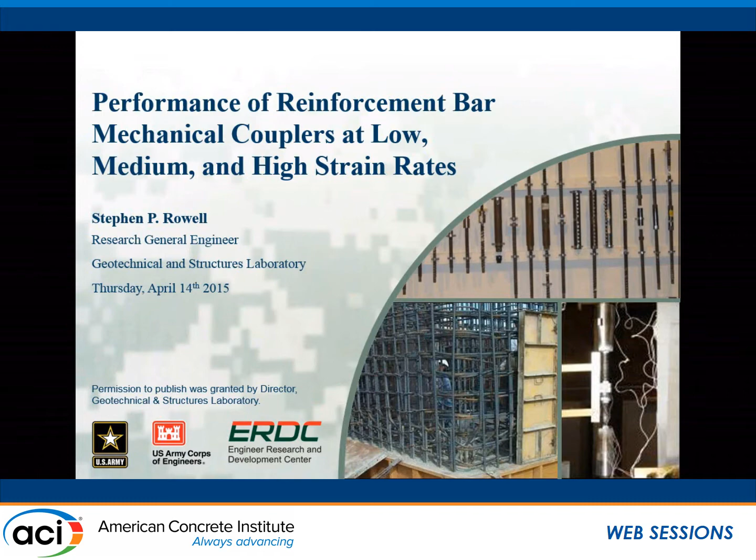So a little bit about what we're going to discuss. Some background of some previous work. There was some work done back at ERDC, or at Waterways Experiment Station, back in the 70s that was incorporated in our existing guidance at that time. But many of those splice systems were based on welds and different types of splices that are kind of irrelevant based on current practice. And so Steve expanded on that with some additional testing that we'll talk about.

We'll talk about what the guidance was in the UFC prior to Change 1 that Bill talked about a little bit, and then what that guidance looks like now. And then we'll go through some examples of different mechanical couplers that are out there. They sort of cover the main families of mechanical couplers that are available today, and we'll just go through their performance.

So just a quick background, and Bill did a good job covering this. But in Change 1 in our UFC 3-340-02, that incorporated for the first time the implementation or potential use of mechanical couplers for reinforcement. And so it provided a testing protocol and guidance on acceptance limit states for actually using this in practice. So this was implemented in the UFC primarily to replace lap splice connections, especially in areas where we have heavy reinforcement or larger bars where we have to use mechanical couplers oftentimes to prevent congestion as well as improve economy, in some cases for very large bars.

And so this built upon the previous research that was conducted by Flathau. We'll go over that a little bit, back in the 70s, with new work conducted in the late 2000s that's been published and since incorporated into guidance. And so this expands upon a lot of data that's out there on these mechanical couplers for more normal loading conditions. So there is data out there for using mechanical couplers in quasi-static loading strain rates, up to somewhat intermediate strain rates that might be relevant for seismic type loading conditions or cyclic loads, but there hasn't been any studies until some of the work done here to look at dynamic loading conditions and the behavior of many different types of mechanical couplers. And so that's where this work came in.

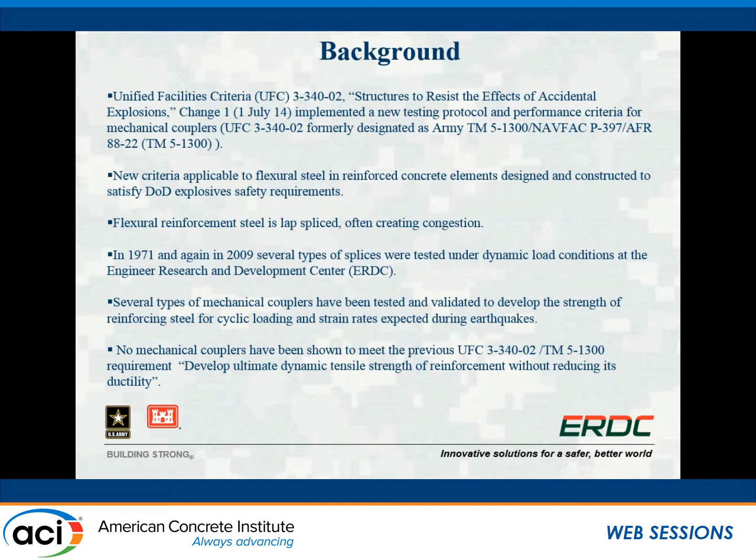And as Bill mentioned, it was really to build upon or to allow the applicability of using some of these mechanical couplers to expand upon the original guidance provided in the UFC. And you can see that quoted at the bottom, which states, if you're using a mechanical coupler, it has to develop the same ultimate tensile strength and same ductility as the bar itself. So, if you read that very literally like a lawyer, basically no mechanical coupler that's out there today meets that requirement. So we're going to go through what the actual behavior is and some acceptance limits.

So the original research done by Flathau was published in 1971. This was done back at the then Waterways Experiment Station. You can see the title of this report, Dynamic Tests of Large Reinforcing Bar Splices. And I believe this has been made electronic, and you can probably Google it and download it. And so they looked at various splices that were available at that time, focusing on number 11 bars at quasi-static, intermediate, and high rates, just given the limitations of equipment. Looking at grade 60 and grade 75 bars with splices at that time that were primarily based on welded connections.

This is the setup. This looks very similar to what we use today. Over in Steve's building, I think it's a 200 kip high rate loader, which is gas driven, and they have high speed cameras and things. This is from the original report, so everything's been updated with new instrumentation and things, but it looks basically the same today, other than it being color. And so here on the right, you can see a little review of some of the research that was executed by Steve and his group in 2009.

That was published in an ERDC report, I believe TR-09-8 is the document number, and it's titled High Strain Rate Testing of Mechanical Couplers. This replicated the work that was done by Flathau, but looked at a variety of new types of mechanical couplers that are on the market today.

They focused on number 10 bars, replicated the strain rates that were done in Flathau's study, and then did tests on as-rolled and machined bars, so we have some control baseline results to compare against. Then they looked at a variety of these different coupler systems: upset couplers, grouted sleeves, shear screws, threaded systems, and threaded bar couplers.

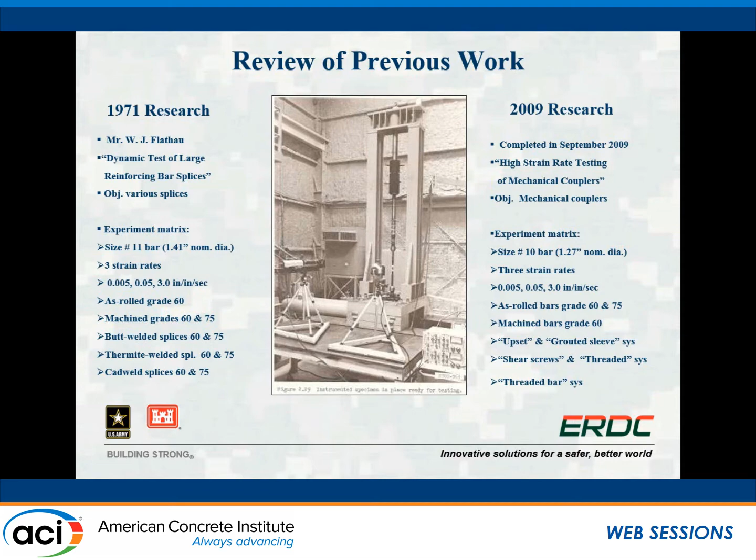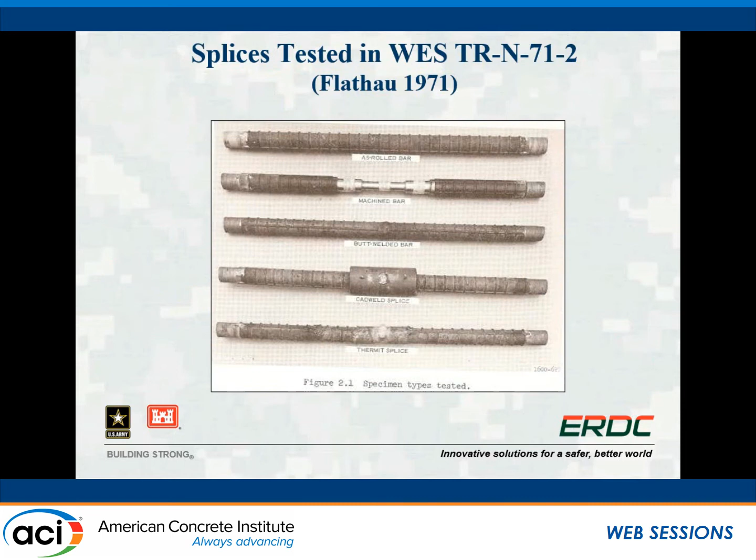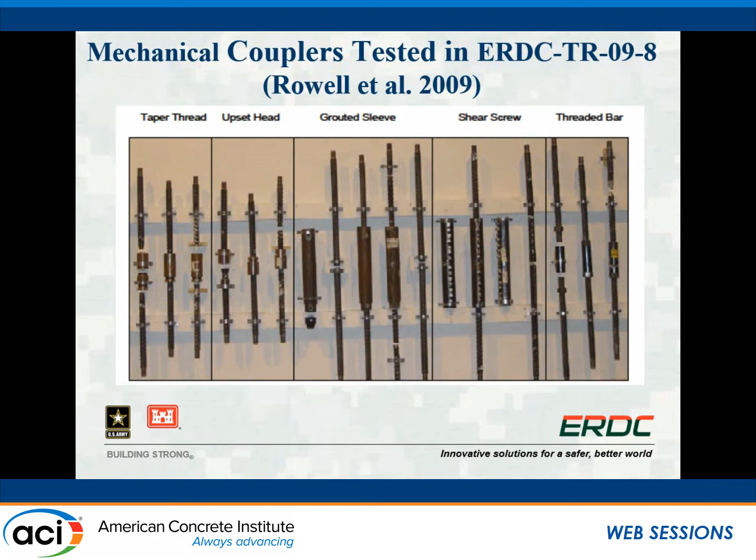Here's a photo of some of the couplers and the control baseline samples from Flathau's original study. This is just cut out of the original technical report. Here you can see a photo of some of the different systems that Steve and their team examined. The study is a lot more broad than this, but as far as applicability to UFC, this is the data it's based on. So a variety of different coupler systems: the tapered thread, upset head, grouted sleeve, shear screw, and then threaded bar coupler.

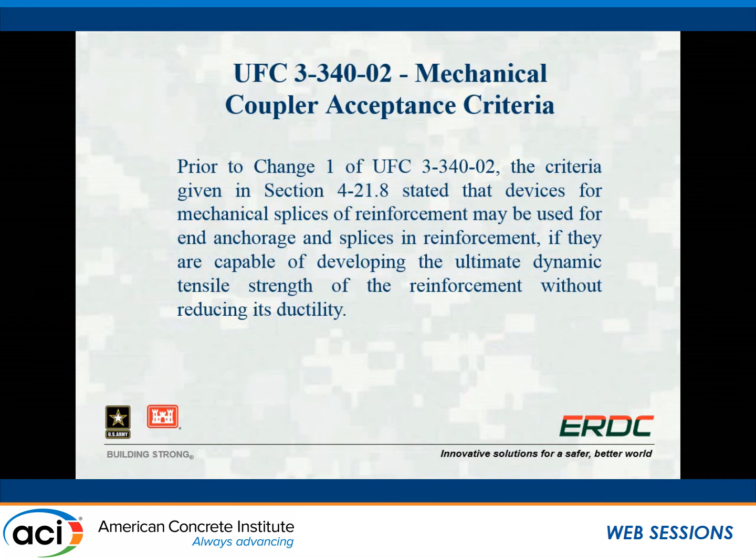If we look at that guidance prior to Change 1 in UFC, again, it requires that if we're going to use mechanical splices of reinforcement, they have to develop basically the same dynamic tensile strength and the same ductility. We're going to step through a lot of data and look at how that is very difficult, basically impossible, to achieve with most of these. Even in a perfect system, they still introduce a defect or discontinuity that makes these systems prone to reducing mechanical properties somewhat.

I'm just going to show a few different stress strain curves for some of these different systems. These are all obtained in these dynamic tests, so it's a strain rate of 3 per second. You can see these black curves are for the baseline material, the as-received, as-rolled reinforcing bars. For these particular grade 75 bars, the yield strength is about 80-85 KSI, and you get about 12 to 14% ductility.

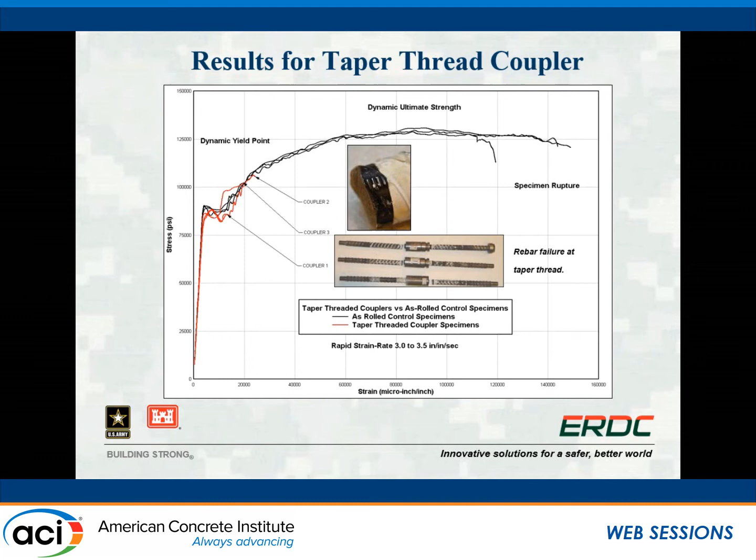It's pretty typical. But in the case of this tapered thread coupler, we can see pretty significant reductions in ultimate strength. The ultimate strength in these bars is around 130 KSI, and it reduces in this case to around 105 KSI. You also get some pretty significant reductions in ductility, from 12-14% down to less than 3%. I also wanted to note that most of these failures are associated with the coupler, with threads in the coupler initiating fracture.

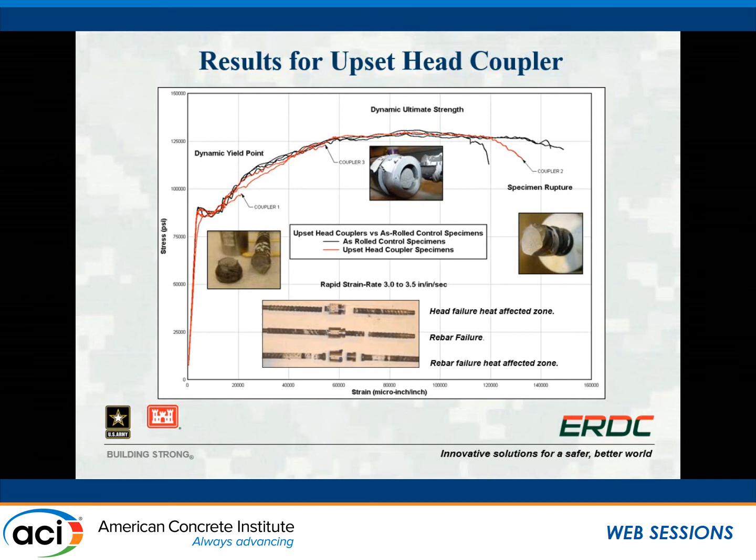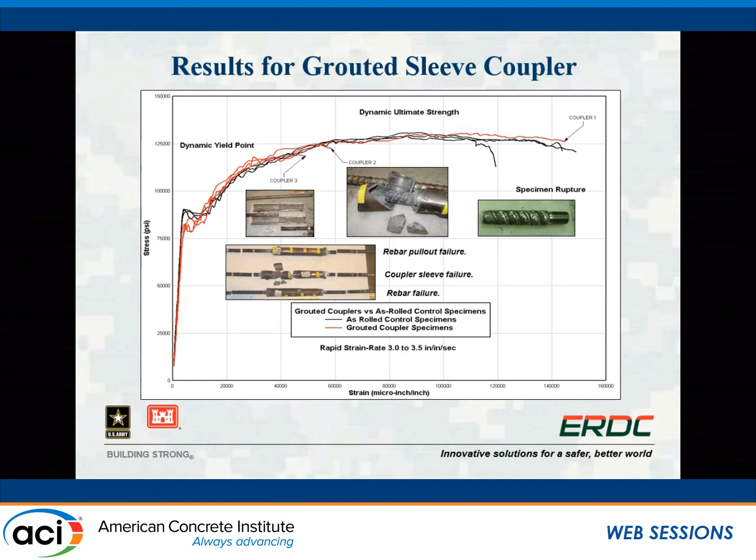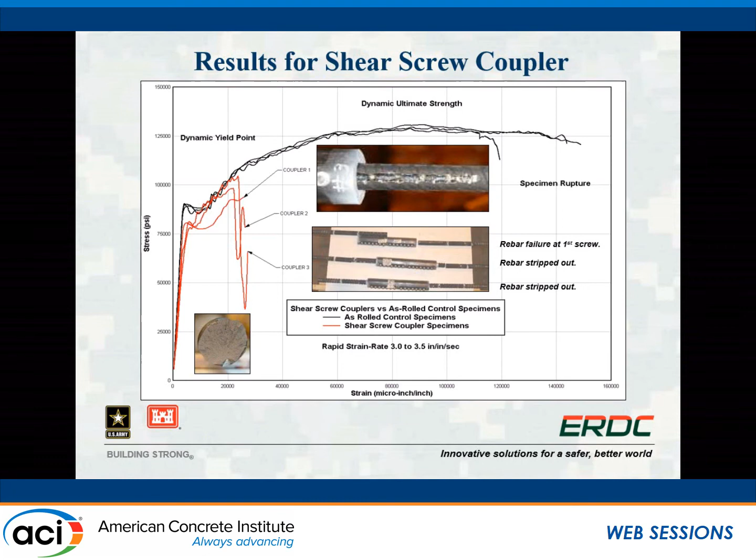The shear screw couplers all behaved in a similar fashion, especially at dynamic strain rates. We'll see some actual quantitative results from these. But for all of these tests, we saw significant reductions in tensile strength and ductility, and they were very consistent between each sample, where in general the rebar just pulled out of the coupler at lower strength levels and lower percent elongations.

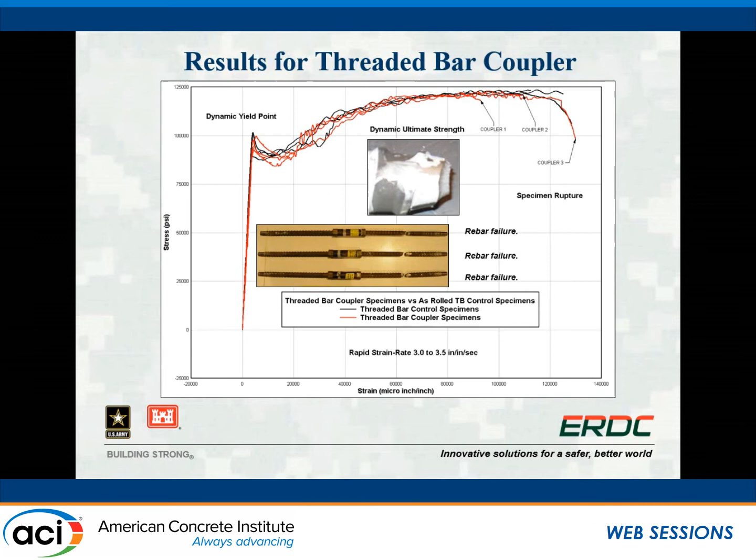Okay. So some of the data from that, as well as a lot of other testing, was used to be implemented in this Change 1 guidance to allow for, or try to allow for more use of mechanical couplers when needed. And so this is the language of how that was incorporated. So now we have some guidance on how these tests can actually be conducted, which will replicate the work that was done by Steve and his group.

So it defines the way the test is conducted, the strain rates that have to be considered, and those are referenced back to that ERDC TR09-8 with a minimum of 9 tests, so you do triplicate tests at your 3 different strain rates. And so the acceptance limits for this, now we have an actual quantitative ductility limit rather than just saying it has to match the properties of the bar itself. We can reduce that and allow for some reductions in ductility based on the coupler.

And so if out of those triplicate tests, all of them have similar tensile strengths and they exceed 3% elongation, you can accept those couplers for use. Now, if 1 out of the 3 actually doesn't meet that 3% strain, we can test 2 additional samples. Those 2 additional samples have to meet the 3% elongation requirement, so a total of 4 out of 5 have to meet the elongation requirement. Otherwise, that coupler is rejected.

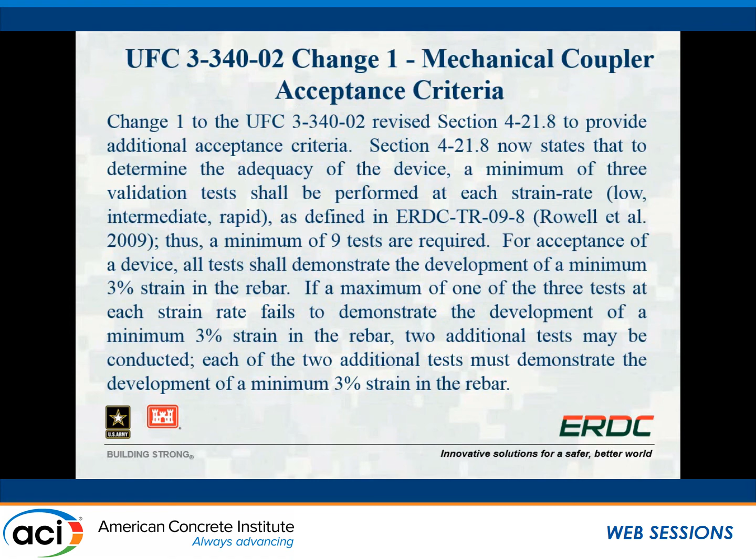Okay, so just to show you a few examples of these different systems, and again, these requirements apply at all strain rates. So if it doesn't meet at quasi-static, it's probably not going to meet at dynamic either, but in some cases that doesn't happen. So I just wanted to step through a few examples. We can actually look at some numbers rather than stress strain curves to compare for these.

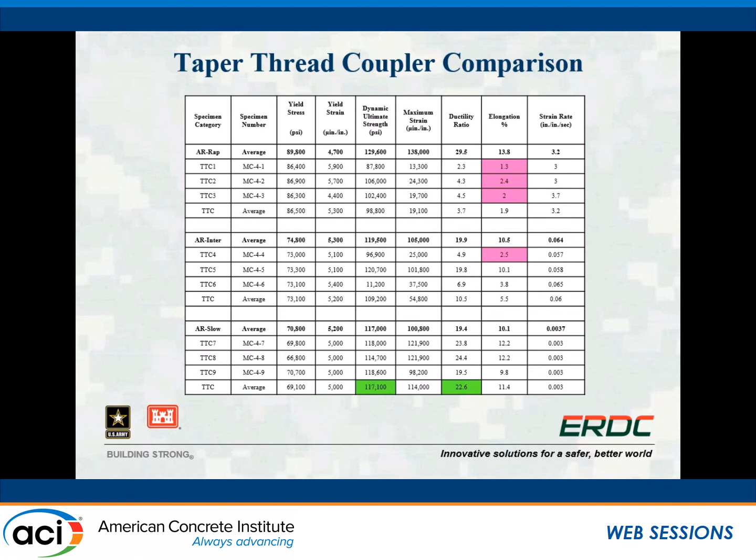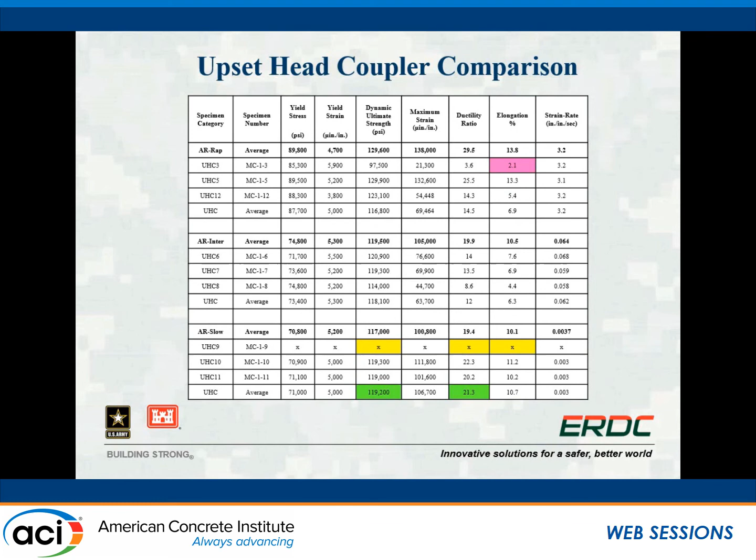Similar for this upset head coupler that we talked a little bit about, we get fairly good performance if we're looking at quasi-static strain rates, but as we step up to dynamic strain rates, those properties are reduced, both the strength and percent elongation. For the grouted sleeve, even though the failures were probably not ideal, did have acceptable properties at all strain rates. We saw tensile strengths and elongations that were acceptable based on the UFC Change 1.

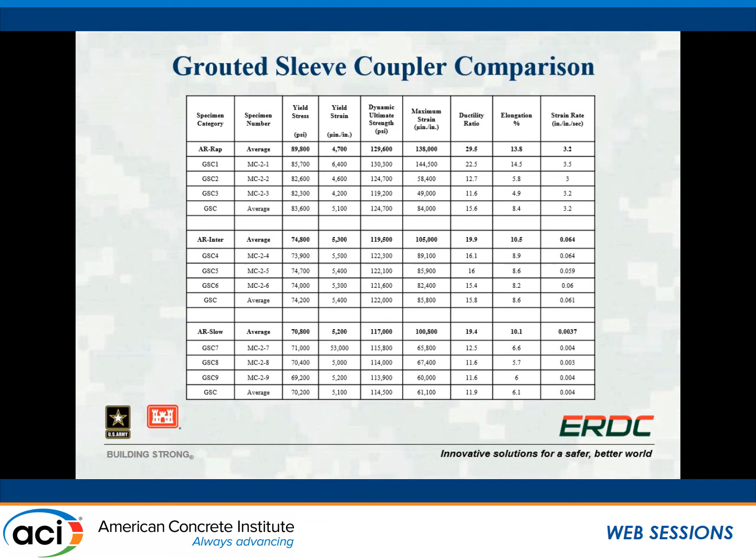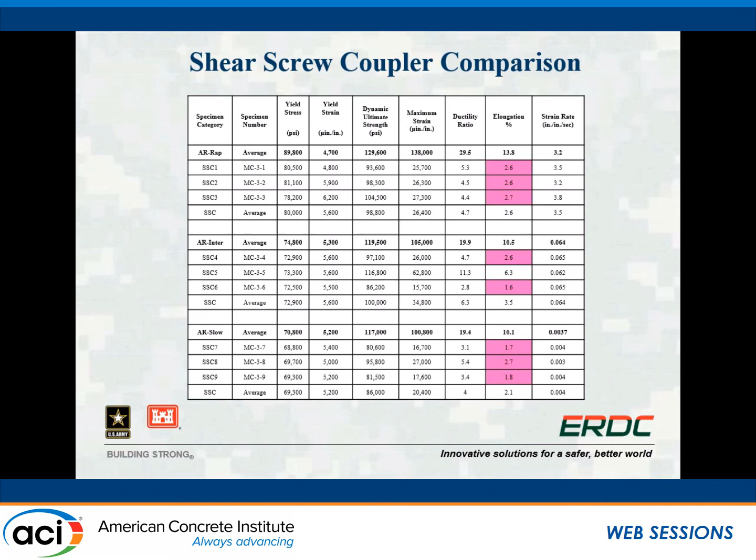And then the shear screw coupler, this didn't actually perform well even in quasi-static conditions. So you can see the results where we've got reductions in tensile strength of the bar and also reductions in ductility, and those extrapolate through all the strain rates that were investigated where we just had pull out of the bar from the coupler. And then finally for this threaded bar coupler, which performed the best out of everything that was investigated. And so you can see in quasi-static, intermediate, and high strain rates, we saw acceptable levels of ultimate strength and percent elongation for all the samples tested.

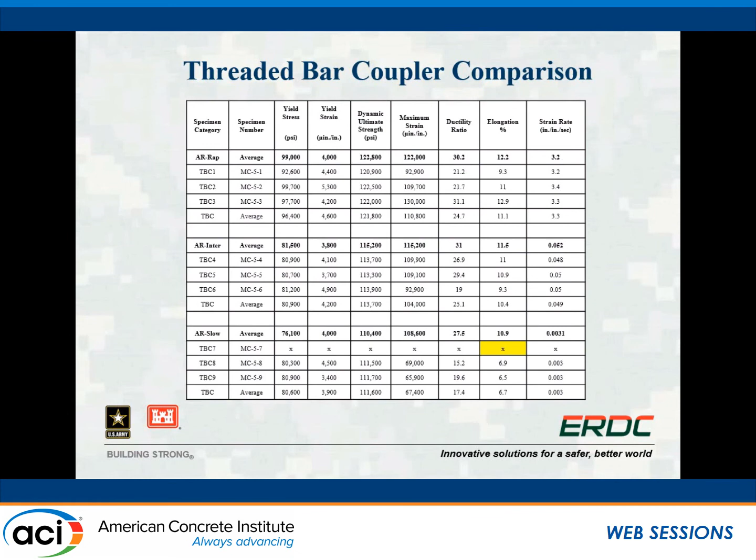So just some conclusions from that testing that was done. Again, in UFC Change 1, we've incorporated guidance to actually do this testing. Under the previous testing, if we use the previous criteria, only 2 out of all the modern coupler systems that were investigated would meet those requirements in quasi-static conditions. None of them would meet the requirements in dynamic conditions.

So if we look at this Change 1 incorporation in UFC, 1 of the 5 coupler systems that was investigated, that threaded bar system, actually meets those requirements easily. 2 of them had at least 1 test out of the 3 tests that required additional testing, and those were deemed to be adequate. And then 2 out of the 5 systems were deemed to be inadequate and were rejected. No additional testing was required.

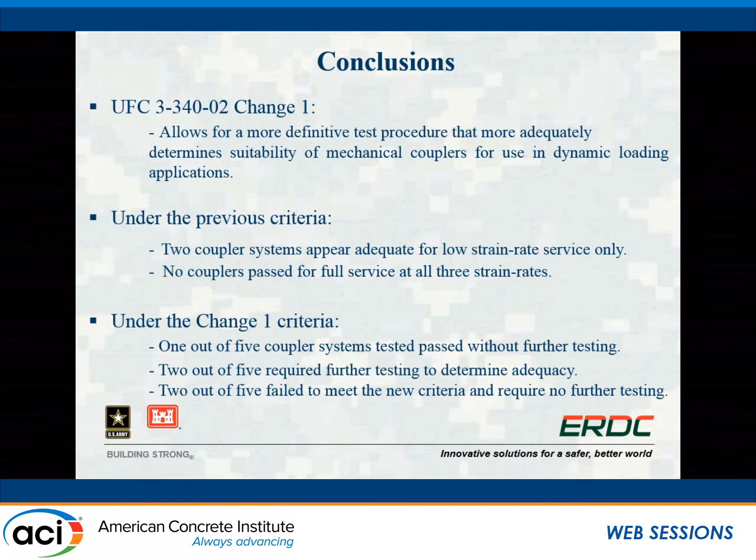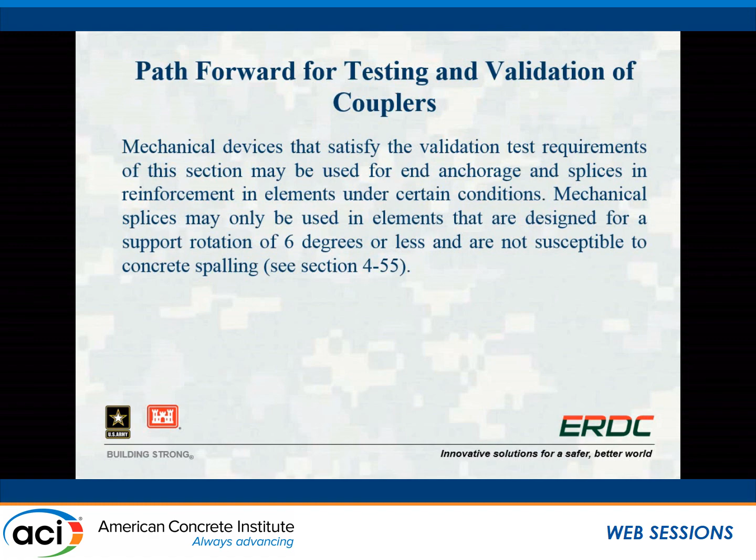So how we're going to incorporate this into UFC is, so now we can use mechanical devices, mechanical couplers for connections to replace lap splices in congested zones in reinforced concrete systems, with some provisions based on confinement that needs to be provided by the concrete, especially in areas that are prone to spalling and things of that nature. And so the guidance for actually doing this testing has to be done in our laboratory according to the guidance provided in this TR09-8.

And based on some additional testing that Steve and his group actually executed, they've divided that into 2 different size ranges where tests have to be performed depending on when and where the couplers are actually going to be used. Most oftentimes that's going to be on larger bars, but in some cases, may also be applied for smaller bars, especially for retrofit applications and things like that. And so those bars can be tested to determine whether they're applicable, and then the results for that coupler can be basically extrapolated over the other bar sizes in those groups.

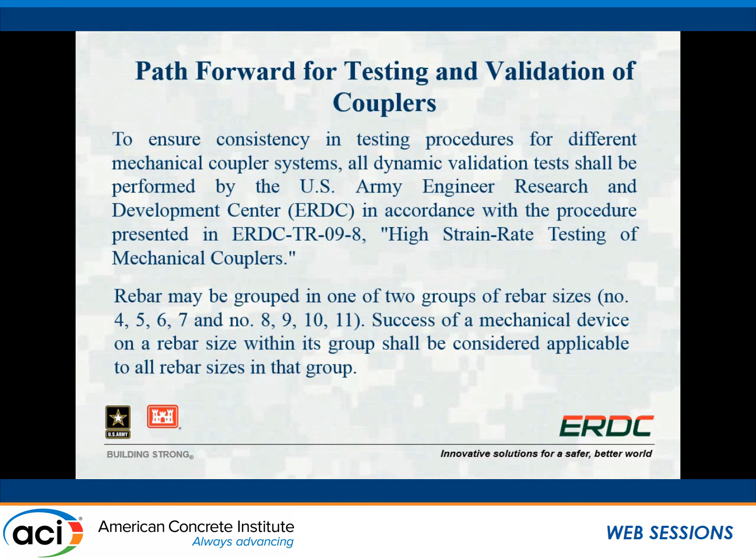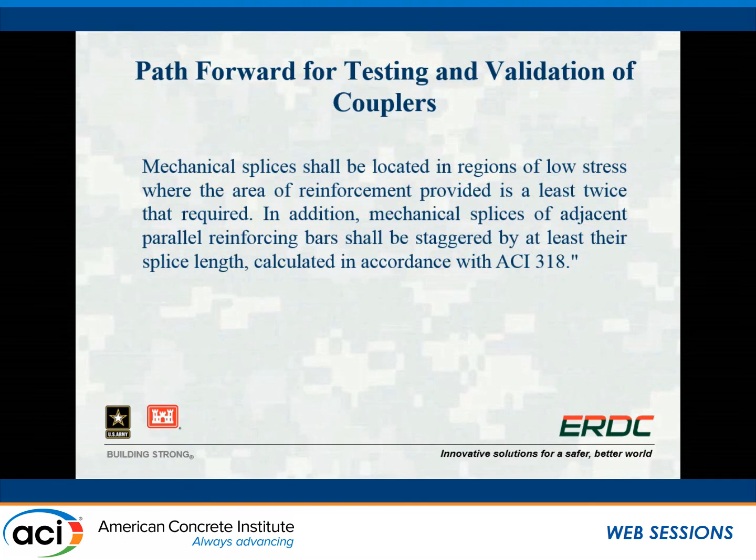And then, like anything we would do with a mechanical coupler or lap splice or anything, we try to put it in low stress zones and stagger the locations of couplers because there's still a failure point of weakness and discontinuity. And so we try to do this to help with redundancy considerations.